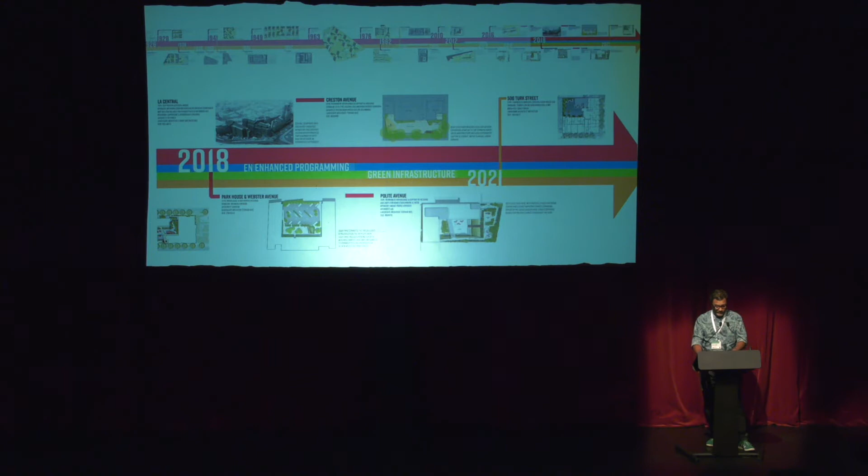For the past 15 years, we have partnered with non-profit client teams and collaborated with architects, clients, and engineers, designing new affordable and supportive housing throughout the city. To date, we have completed over 50 residential developments across the city that include a total of 5,000 residential units.

Most of these projects have been made possible with a mix of city and state funding and philanthropy, with non-profit organizations developing and managing ongoing operations. We have focused on the design of these open spaces, shared amenity spaces, streetscapes, community gardens and rooftop farms that are part of these projects.

Our expertise and experience over this period of building has taught us that there are three key elements that keep coming to the top and are part of our process. The first is developing site-specific design strategies for projects with limited resources, using the creative power of collaborative teaming, and I'll talk more about that with specific projects.

The second for us has been, for project types such as multifamily, senior housing, shelters, and other transitional housing for previously homeless adults, youth and families, veterans, and previously incarcerated individuals, the understanding of the unique programmatic needs of diverse resident populations, and how these needs can inform accessible design for all.

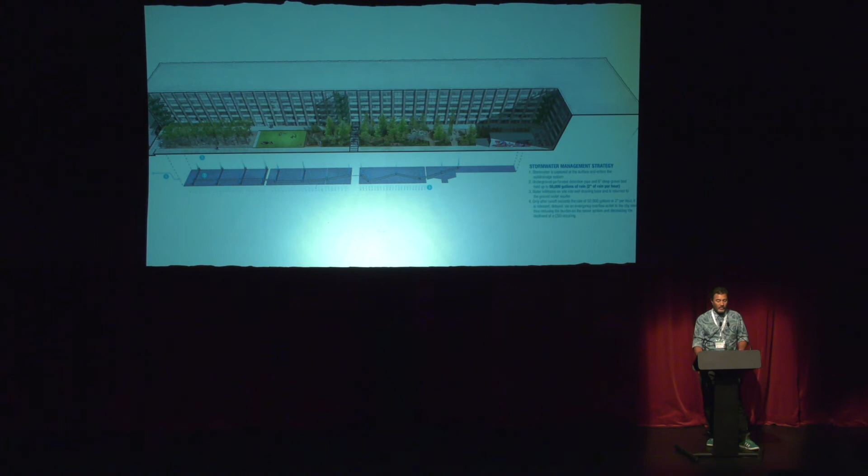The urban forest was a big key piece of this, but it also needed to be flexible enough to allow lots of different uses. So simple materials, concrete, paint—budget was tight, but we kept it. We had designed some built-in elements that could be used by kids and families, playful elements, but not play equipment.

In the office, we spend a lot of time, but for me it's really important for a new project to be on site with the team. Some of those first conversations can really crystallize a thread that will run through the life of the project.

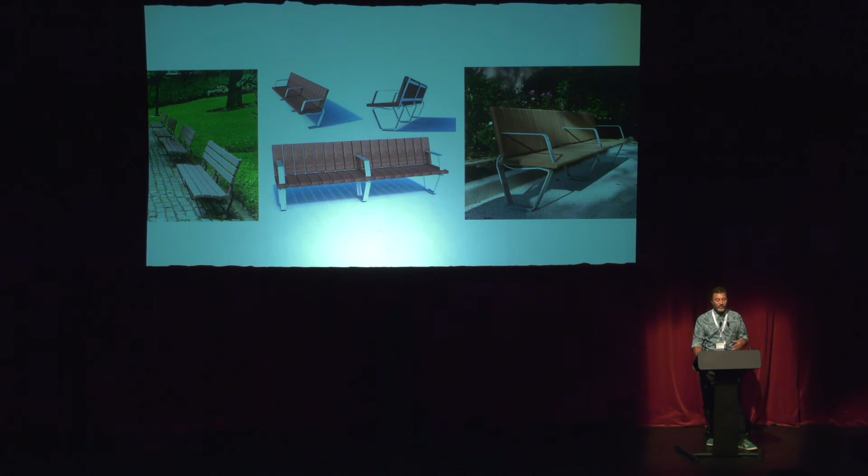So thinking about materials as having more than one life, we try to use as much as we can. We're often adding elements and thinking about renovation in those ways, which has been useful given these older sites.

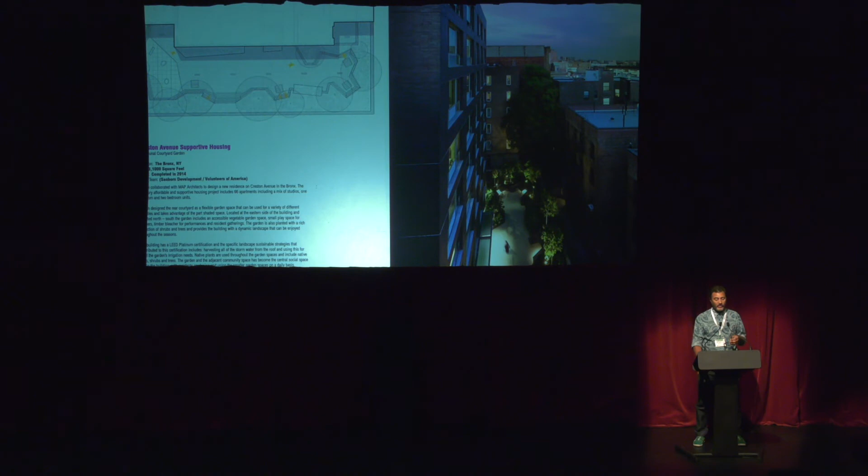Going down in scale, this is probably typical of some of our housing developments. This was actually the first one that we completed with one of our colleagues and collaborators, MAP Architects, and this in a way set the stage for a lot of projects that have come after, as we were testing new ideas and working together.

From the point of collaboration, this was a milestone for both offices, and we've continued to work on multiple projects. We've really been able to develop a design language and almost a kind of shorthand, so it's been really great to have the time to do that.

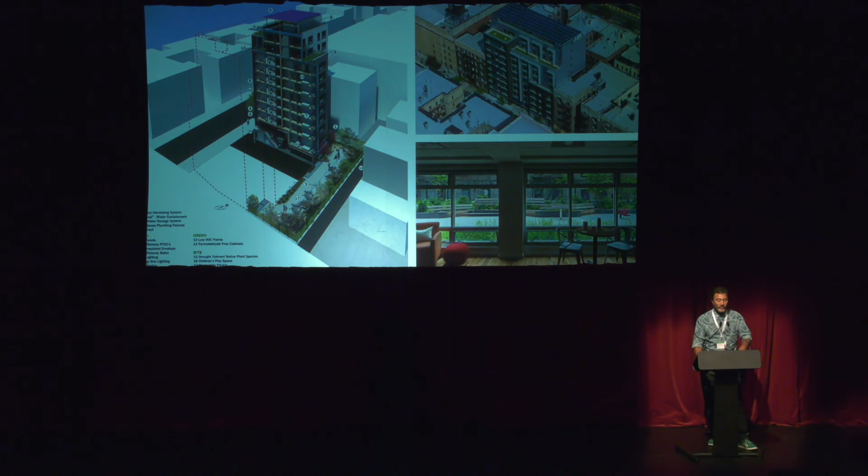A lot of these new housing developments have high sustainability ratings - LEED certification, passive house guidelines, Enterprise Green. So even though they're affordable and supportive housing, they actually have really well designed teams, technically really strong, and it's been rewarding to work in that space with these other like-minded designers willing to work on these types of projects.

Just some images of the space. A lot of our residents, like for example at Creston Avenue in the Bronx, were formerly homeless, and for many of them this was their first home off the street. A lot of these folks are on medication, so we needed to design a space that was open, with clear sight lines, and not hemmed in.

So you'll see a lot of individual garden pockets, but thinking about their experience and trying to really tailor it to their ongoing use and where they are psychologically. And so a lot of built-in seating, a lot of planting, opportunities for...

vegetable gardening - you can see on the lower left. We're often introducing urban farming as part of the programs, and it's been really rewarding to be part of that, really making use of a lot of spaces on the roofs. Some years you'll get a couple of people that are really into the garden, and some years it'll just lie fallow.

But it's about working and designing and thinking of flexibility and failure - that it's okay if it's not going to work every single year, but just thinking about that. Connecting - it seems really obvious - but connecting outdoor spaces to community rooms and laundry spaces, for daily use.

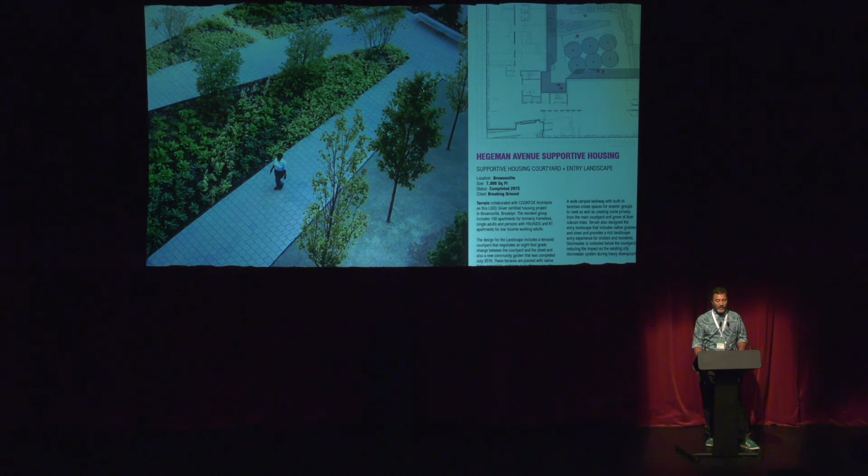Just thinking creatively about how to deal with limited resources, and also trying to avoid big, massive retaining walls and so on.

The great thing about this project is we teamed up with another small non-profit that specializes in building community gardens, building and managing them. They're called Sprout by Design, and it's been great. There are lots of other smaller design professions that are carving out a niche and really trying to contribute and make a difference - they both construct, build, and manage.

For a lot of these non-profit housing developments, it's perfect. They come in, they're really efficient with what they do, they run their programs, and they can get access to funding separately. But it's really taken a while to navigate how that model works, and it's been great to discover and work with these guys.

This was a challenging site: a big parking lot on the shady side of the building.

Probably one of the big things was that a lot of these sites are infill, so they might have been brownfield sites, meaning they might have been a gas station, or there was an oil spill, or some kind of industry. These are sites no one else has wanted, and the city has been good about allowing and providing these spaces for non-profits to develop and transform. But we're dealing with dirty sites, so we needed to figure out early on how we could build a healthy landscape while staying above a certain datum.

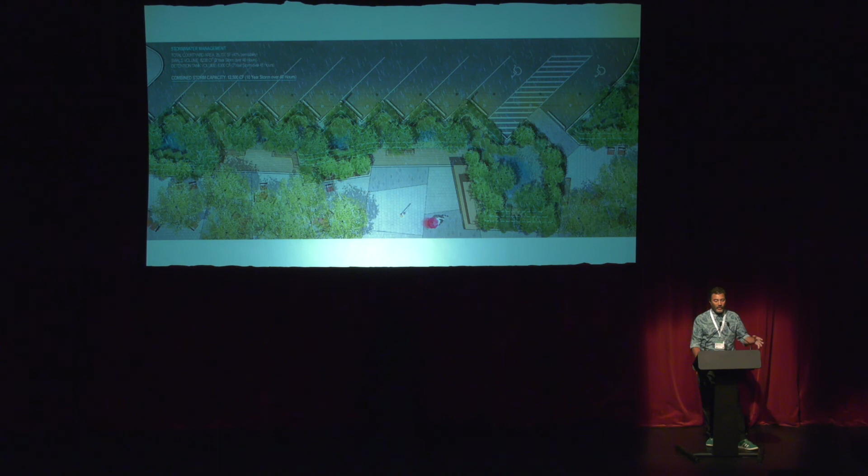One of the great things we've developed is relationships with civil engineers, where we've been able to design together. That's been one of the most rewarding technical parts of our work, working with engineers who are really rethinking what goes underground, like all the cost of these big tanks, and thinking creatively about how we store things in a really thin profile. We have this core group of consultants that work with us, and we've been able to solve technical problems and help the client reduce underground costs.

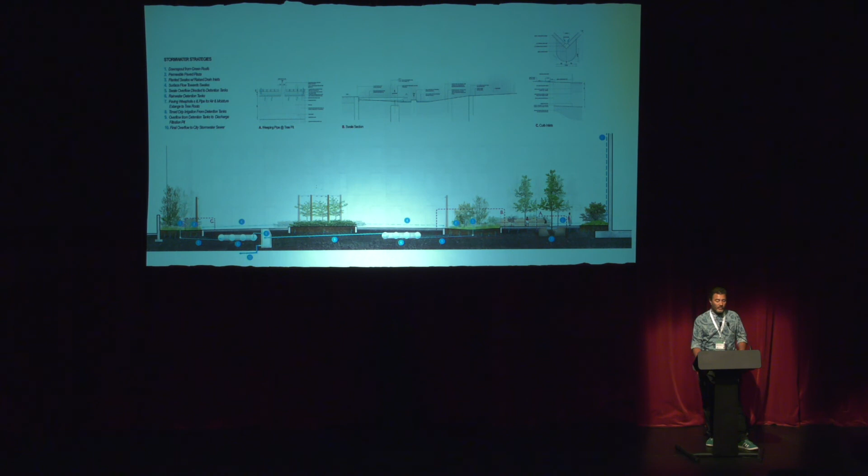So this is essentially a parking lot on the left-hand side. There's no drainage in the parking lot, so we're draining the entire area into this bioswale on the left, and that forms an edge to the community amenity spaces on the right.

This is probably the smallest project we have in the office right now, and this is for the Bea Arthur Youth Shelter in the East Village.

This has really been a labour of love. It's a site I used to walk past for years. It was boarded up for probably 15 years and was a crack house in the late 70s, early 80s, and the city finally released it.

We worked with the Bea Arthur Foundation, and this is the first shelter for LGBTQ youth, formerly homeless. They run really good programs, and their outdoor space has been a key part of their rehabilitation, providing a secure, colourful, small space where they can hang out. It's a 4-story, 5-story building.

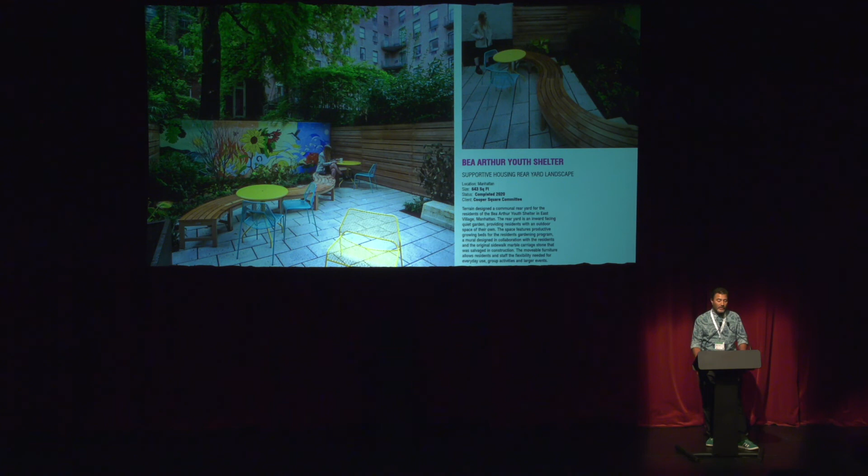A lot of these buildings in the East Village had what's shown on the left-hand side, these two images of what's called a carriage stone. This would be out the front on the street - you would get out of your horse carriage, step onto the stone, and then onto your property.

So we salvaged this stone, and it's now become the small seat that sits in the back, a nod to the history of these sites. We're often looking for clues and trying to reuse materials. It's been really rewarding - this is the first season, and we're going to open it this spring.

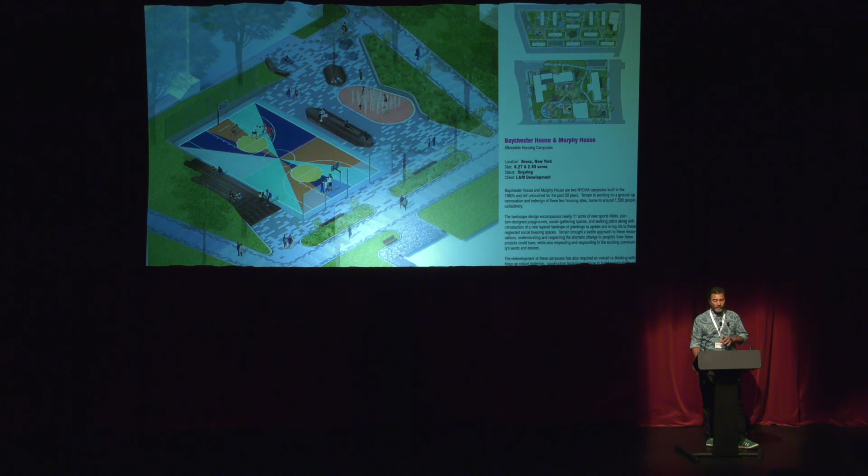These are two, again, large-scale projects in the Bronx. Very challenging site, big sites, 9 acres, 12 acres. This is still partially in construction, but I wanted to show you - on the left-hand side was when we arrived on site, and on the right are the renovations we've been able to do.

I think the amazing thing about working with these older sites is you're dealing with mature canopy trees - it's almost like an arboretum in a lot of them. So starting with that overhead structure and thinking about new materials, building entrances, improving these spaces - you can see these are some of the little design studies, low cost, but more about better organization, creating spaces for people to sit.

And playgrounds, bringing color, is a big part of what we do. I think New Zealand does such a great job—every little town I visited has amazing play spaces for kids.

These are construction shots, but you can see another layer of more recent ideas about perching, getting rid of fencing. A lot of these landscape spaces are fenced off, so for the first time, residents have access to their huge campus.

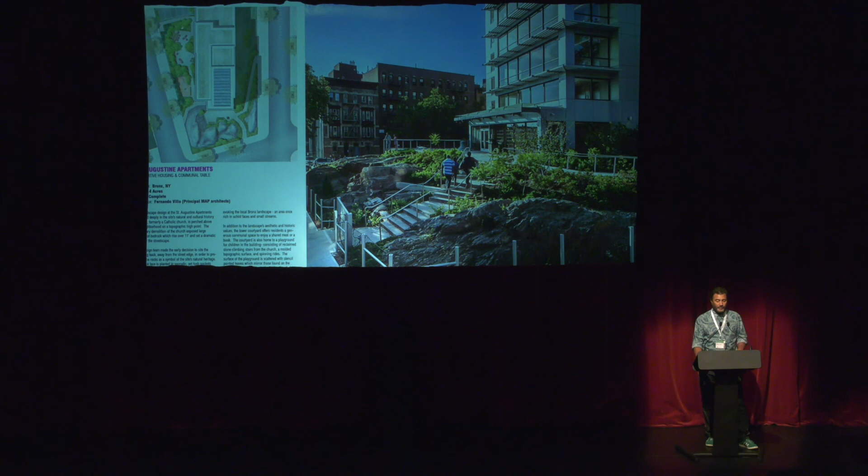So you'll see a lot of this rock in the front—this is the entrance. A lot of it was covered by the church, and once they demoed it, we discovered all of the stone once the church was pulled away. Very early on we realized it was such a special and amazing part of the site. The Bronx is very hilly, with a lot of stone outcroppings—it's really amazing where the stone comes up. The Manhattan schist is revealed in the Bronx more than maybe some of the other boroughs.

So we convinced the client not to demo it, and to push the building back from the street to really create this entry landscape that preserves the natural geology that was there, but also gave us opportunities to plant into it and use it. You step up into the building, which is pushed back and has amazing views out, south towards the city. On the left-hand image, the food pantry is just to the left, so it gets its own little garden and gathering space, enough room for that program to happen.

This was our first visit to the site, so you can see we're really excited about the geology. Just some of the early models—a lot of our work is convincing anyone who will listen that it's a good idea.

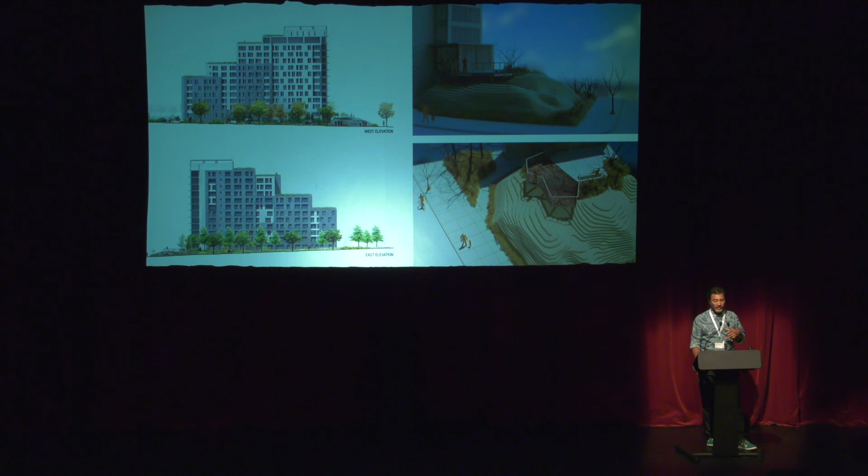I think in terms of affordable housing, they typically don't have a lot of resources. It's not market rate, but they do have really clear missions and a really clear direction, and for us working with those teams, that's a really rewarding part of it. So as designers on the design team, it's our job to figure out how to make the most out of that situation—fewer meetings, provide enough design guidance early on, and try to stay with the project for the life of it.